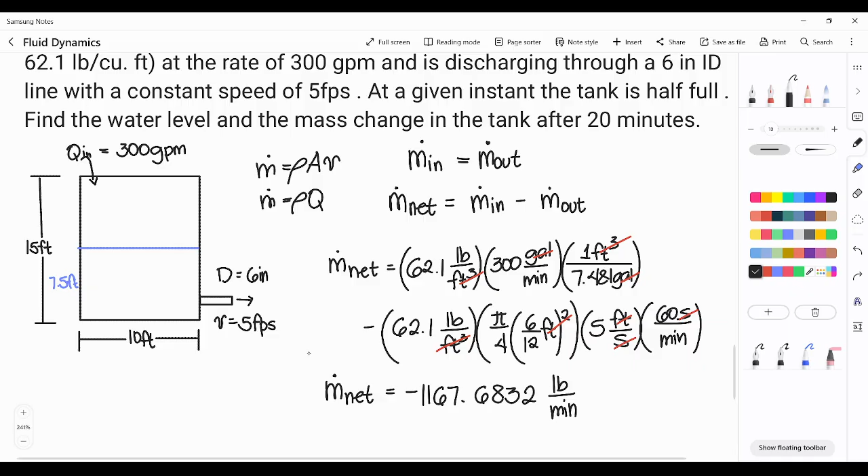So, after 20 minutes, tingnan natin yung mass change. It's simply this, di ba? Mass flow rate is equal to mass over time. And to get the mass, simply, mass flow rate times the time. Kaya natin iniwan yung minutes kanina para i-multiply na lang natin. So, let's do that.

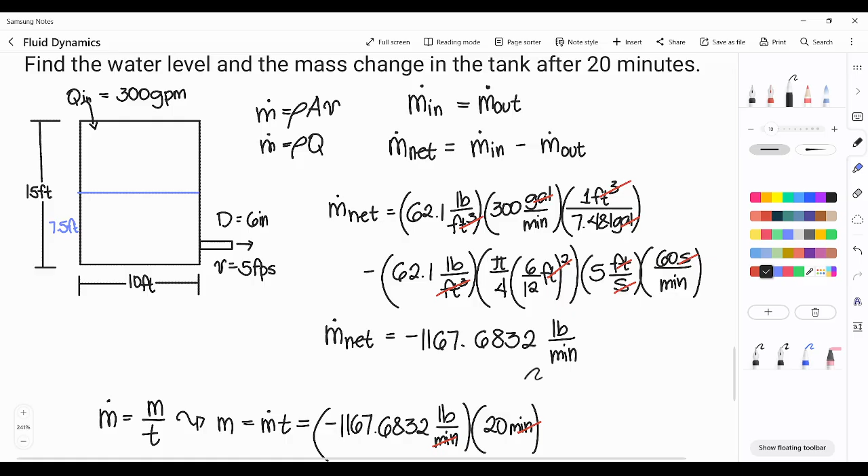Negative 1167.6832 pounds per minute. Tapos, hinahanap natin yung mass after 20 minutes. So, multiply mo lang 20 minutes. O, diba? Cancel out lang yung minutes natin. Mas madali siya. Pero okay din naman seconds, kaso doble-doble conversion. So, by inputting that into your calculator,

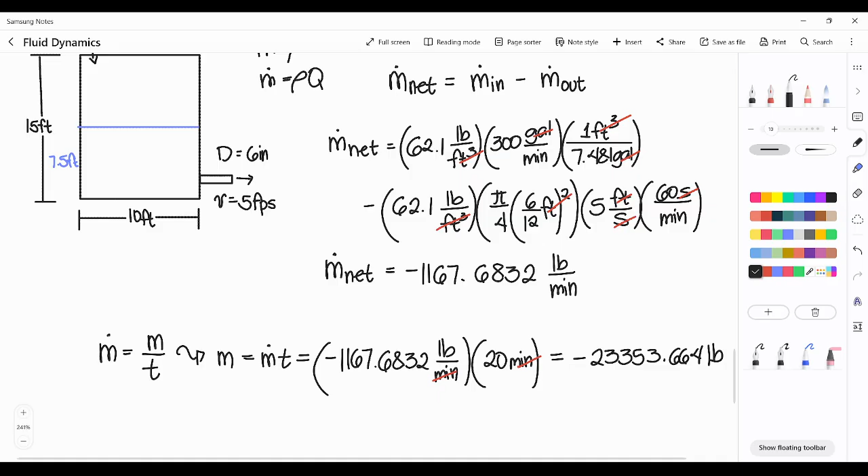1167.6832 times 20, you'll have negative 23353.664 pounds. The negative, again, indicates na nabawasan tayo ng mass. Mas lamang siguro yung lumalabas kaysa sa pumapasok. So, okay na tayo dyan. Yun yung mass change natin, nabawasan tayo after 20 minutes.

Ngayon, hanapin naman natin yung water level. So, paano natin hahanapin? We could use the formula for density. Ano formula for density? Rho is equal to mass over volume. So, meron tayong mass, alamin natin yung volume. So, the volume is simply mass over density.

Negative 23353.664 pounds over the density of water, 62.1 pound per cubic feet. So, that is our density. Pag pinindot, cancel yung pounds, tataas yung cubic feet. Lalabas is negative. Pwede na natin tanggalin yung negative sign para positive. 376.0654 cubic feet.

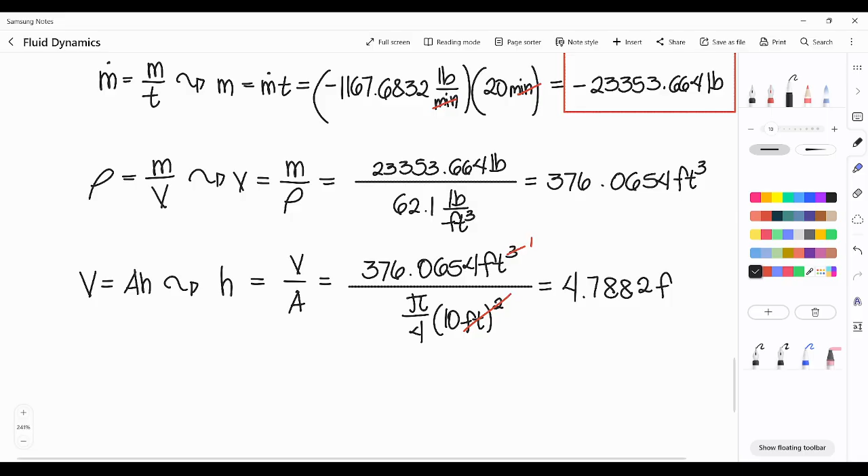Ang area, what do you call this? Ang base niyan ay bilog. So, cross-sectional area is a circle. So, pi over 4, 10 feet squared. So, cancel yung sabay-sabay, may matitirang isa. Makukuha natin yung height na bumawas. So, pag pinindot sa calcu, 376.0654 over pi over 4 times 10 squared. Ang bumawas is 4.79. Sige, 4 decimal na lang, 4.7882. That is in feet. So, ito na ba yung final answer natin, yung water level?

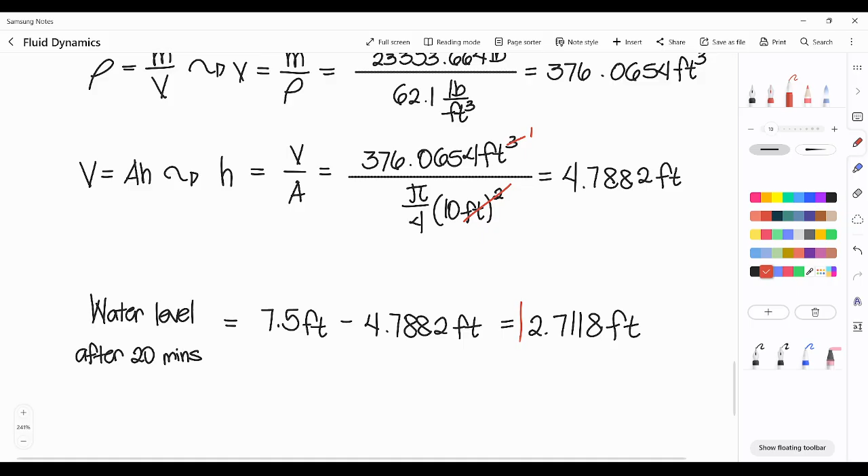So, pag pinindot sa calcu, that is 2.7118 feet. So, ayan. We are done. This is yung water level natin after 20 minutes. So, ang laki na bumawas. Kanina, 7.5 feet yung water level.